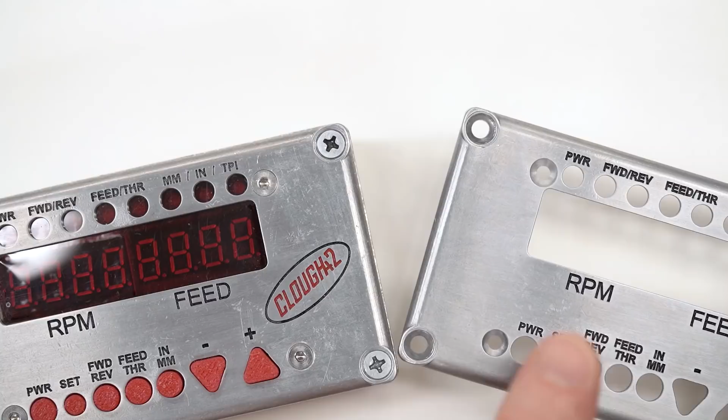I showed that in a previous video, and the engraving takes even longer. I did try an experiment with using a diamond drag engraver, which would be much faster, and it ended up just being kind of illegible. So I went ahead and just engraved over the top of that to depth and made another one, just trying to see how fast I could do it. But it's just time prohibitive to manufacture these in any kind of quantity.

So what I want to do today is design a new control panel, or a new front panel, that is exactly like this and is interchangeable and will drop in, but that is made as a PC board with the markings done with the silk screen. That's something that could still look great and could be manufactured in any quantity just by placing an order to the fab. So let's go into the computer and work up a PC board design for a control panel.

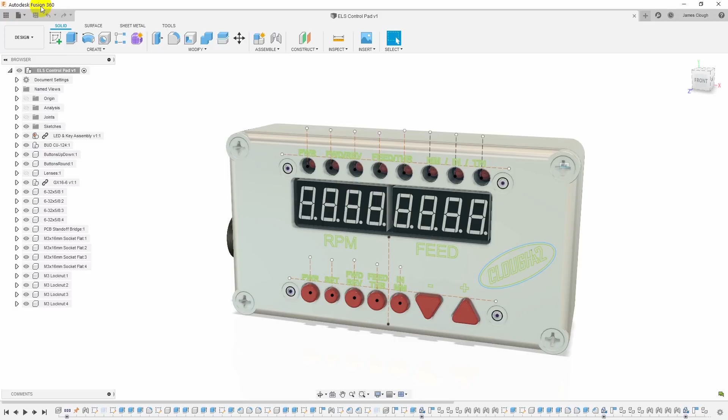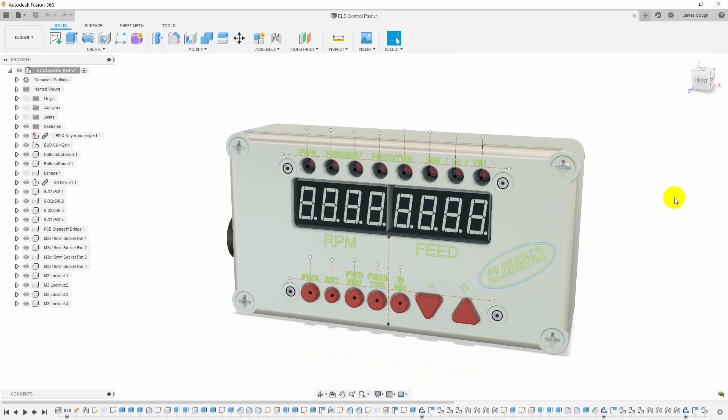I'm going to design the PC board control panel in Fusion 360. As you know, Autodesk a couple of years ago acquired CADsoft, and they have been integrating the Eagle PC board design software into Fusion 360. This will be the first PC board that I've actually designed with this tool, so I am by no means an expert, but we'll go through the process. I spent a bunch of time figuring this out, and maybe you'll learn something, and maybe you'll teach me something. If you see something that I'm doing wrong or there's a better way to do it, throw it down in the comments, and we'll all learn something.

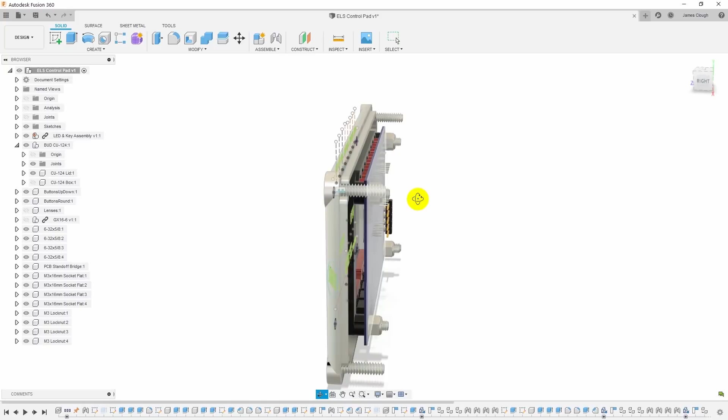This is the 3D model for the control panel, and you can see here I've got the bud box around this, but we can take the box off the back, and I have everything modeled here: the connector, which I'll get out of the way, the PC board and spacer, and the buttons that all fit into here, and then the sketch for the engraving on the front panel. We're going to replace all of that, so let me get rid of the sketch.

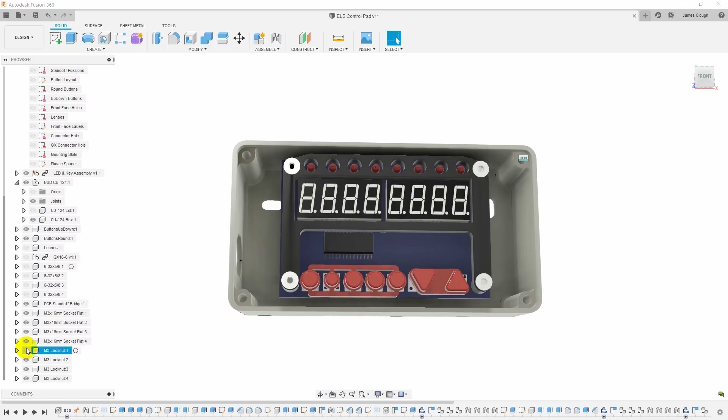What we want to do is design a PC board that fits in place of this front panel, but fits into the box. So let's get rid of the front panel for now, and let's get rid of the screws that are in the way here. So we want to design a PC board that fits into here.

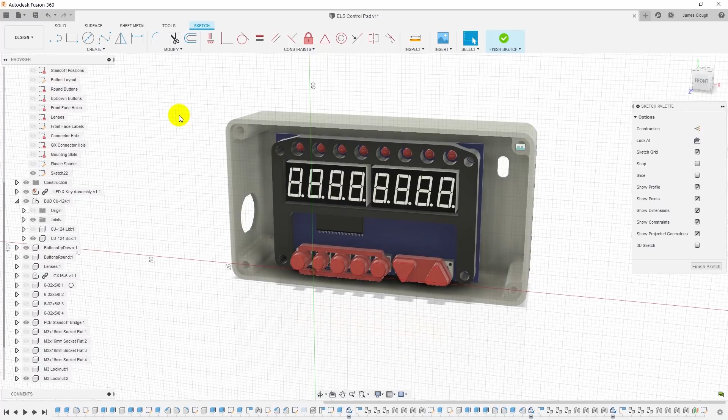Now I'm going to not sketch the PC board outline directly on the surface here. I'm instead going to pull a construction plane forward off of this just so that it's not in the way, and we're not dealing with these contact surfaces creating implied edges, and we'll just create a sketch on this surface. Now we need to bring out the outline of where we want the PC board, so I'm going to turn on construction here because I want to offset from this, and I'm just going to hit P for project, and we're going to go in here and click around the inside edges of this box where we want the edge of the PC board.

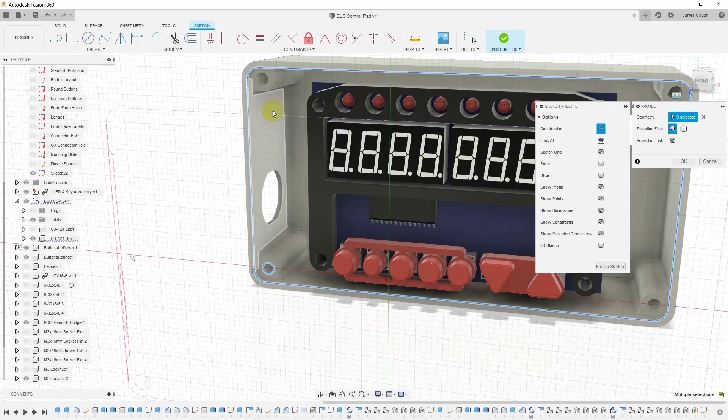And then I'm also going to click these holes where the screws go so that we can put screw holes in the PC board that line up perfectly. Now I'll say OK, and that'll give us construction lines out here.

Now for the actual edge of the PC board, I want to offset from this so that it's not actually in contact. It's a little bit smaller. So hit O for offset, click here, and go in, say, minus 0.2 millimeters. And I don't want that to be a construction line. I want that one to be solid.

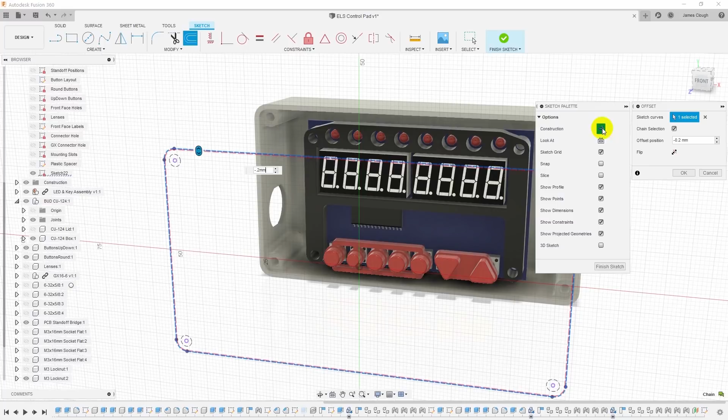Okay, and now let's put in some screw holes. So C for circle, and I'm just going to put a circle centered around each one of these. Now I didn't want to use the actual projected hole from the box because it's actually a little bit smaller than the screw diameter so that the screw will thread into it. I want to make a clearance hole.

So let me just select, hold down Control and click all of these circles to select them, make them all equal, and let me dimension those up. And my favorite table here says a clearance hole should be 144 thou. So 0.144 inches. Okay, so that gives us the actual outline of the board and where the holes should go.

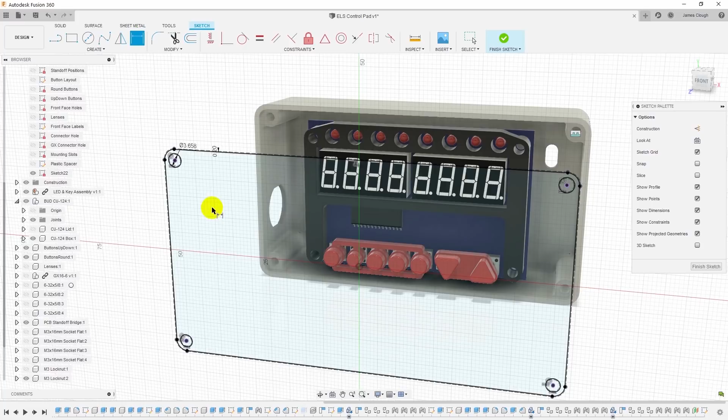Now we need the openings that we milled in the box cover as holes in the board as well. So I'm going to go ahead and turn the lid of this thing back on, and let me turn the buttons off so they won't be in our way.

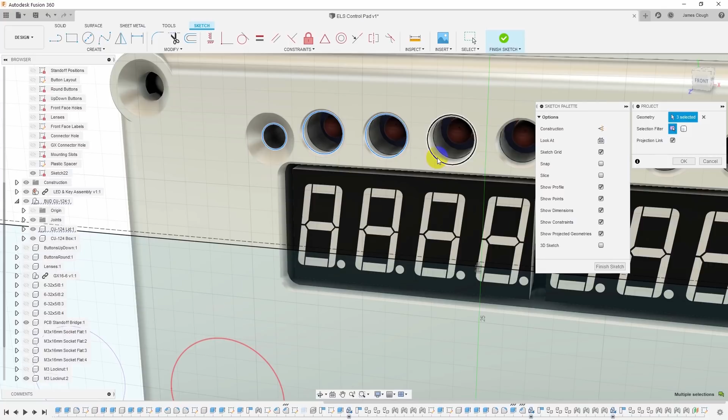And let's hit P for project again. And let's grab a few things. The mounting hole, and then I'm catching the inside, the actual inside of the chamfer of these holes. So we'll get a hole in the PC board the same size as the hole that we milled in the aluminum case.

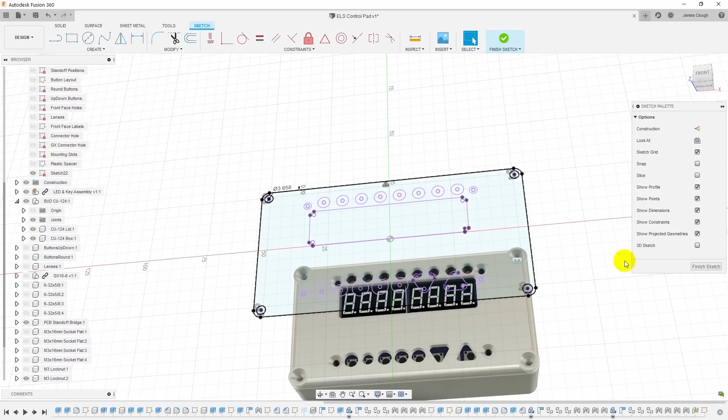Okay, and what does that give us? We've got the outline of the PC board, we've got all the holes for the screws and the buttons and the lights and the window here. So that is our sketch, and that is the outline that we'll use for the PC board.

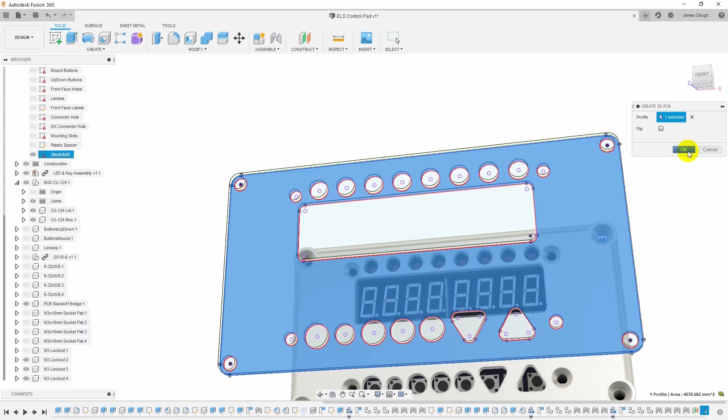Okay, to actually create the PC board, we come in here and say Create, and at the very bottom there's a new option here, Create 3D PCB. I'll select that, and then they want a profile. I'll select that profile and click OK. And now it has created a 3D PC board model. This has layers for copper and solder mask and any 3D packages for components that will ultimately get mounted on it. Let me just save this.

Okay, control panel PCB 3D. There end up being a whole bunch of files once we do this. So we've got the outline of the PC board. That's the 3D PC board.

Now we need to create an electronics project that's going to contain the schematic and the 2D PC board that will be linked to this. So we can come up here and under File and say New Electronics Design. This creates a new electronics design, and let's create a new schematic. The electronics design starts from a schematic where you put in components, then those get linked to a 2D PC board design, and then you link the 2D PC board to the 3D PC board, and it then synchronizes the shape of the board and the components back and forth as you make adjustments.

So let's add some things to this schematic. Now, ultimately, I'm not putting any components on the board, but I do want this to be shielded. So I do want to put copper on the front and back of the board, and I want to have those connected by plated through holes on the screw hole so that the screws will connect it to the grounded box.

So in terms of, I couldn't figure out how to put a pad down or a through hole, a plated through hole. So what I did is I created a library and made a component that just has a plated through hole pad. I'm not going to go into that here, but this is a plated screw hole that I created for a number 6 screw. So I'll just say OK, and I'm going to have 4 of these on the 4 corners, so I'll just lay those into the schematic.

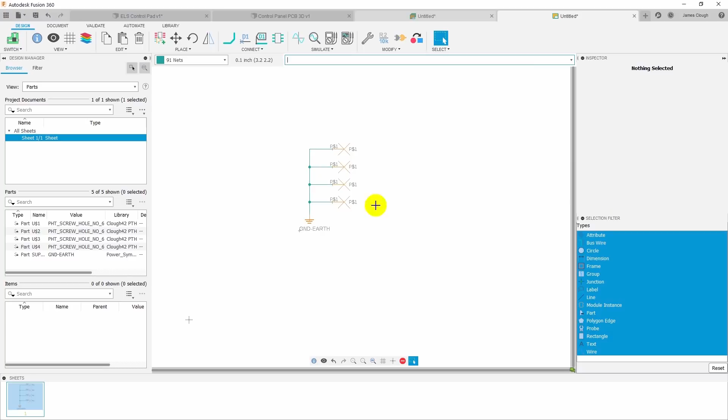And then I also want to place a ground symbol, and I want an earth ground symbol. Place that here, and then we'll just route and connect all of these screw holes to the ground. And that is our schematic. Let me go ahead and save this.

And this was the electronics project that has that link to it. Let me go ahead and save that as well. Okay, so now I've got this.

Let me add a 2D PC board. So I'll click New PCB, and it will add this. And this is now a PC board that's connected to the schematic. We'll save that as well.

You'll note the outline of the board is just a basic rectangle, and we have our components down here, with the 4 screws sitting off of the side of the board. So I'm going to go back to the 3D PC board and click Link to 2D PC board up here in the corner. I click on that, select my 2D PC board design, and it links them together.

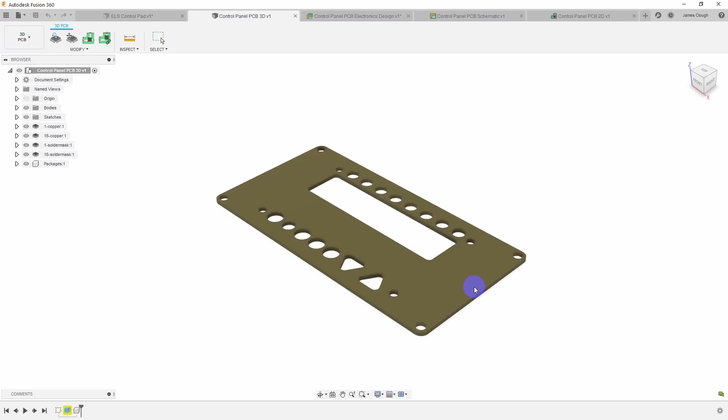So now we're back looking at the 3D PC board, and you can see that now it actually has the correct shape with the correct openings in it. And before I go any further, I'm going to go ahead and save this.

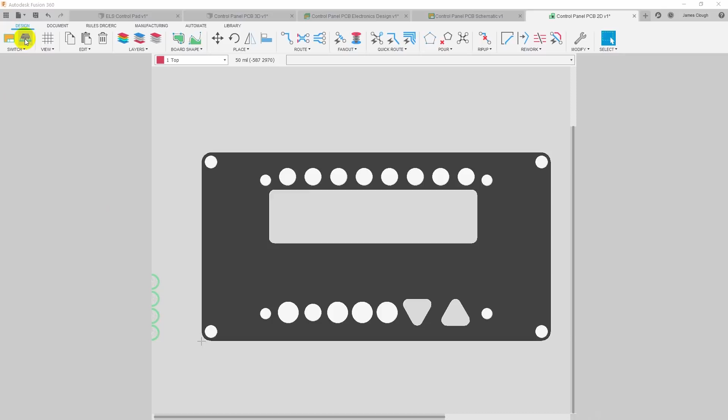But in order to complete the linkage, if I just try to save this right now, it'll warn me that the 2D and 3D PC board documents are out of sync. I don't know why that is, but if I just click up here, say View 3D PCB, it'll take this 2D design, push it over to the 3D model, and now I can save everything and it's all linked together.

You can see we've got the green solder mask, we've got the holes over here on the side, and it's trying to show packages. I didn't define packages for these, so I'll just turn off that layer because there's nothing there. So we have our 4 plated screw holes that are going to go in these corners, and we've got the PC board. And now we can just save everything.

In fact, when you save the 3D PC board, it saves everything except the electronics design. I will admit, I honestly don't know how these things are connected. It seems like kind of a mess to me.

Okay, the first thing I want to do is take these holes that were defined in the sketch, and I want to replace those with the plated through screw holes. And I couldn't find a good way to do this except just to mess with the coordinate system.

So I'll click on this hole and I can see the location: 115, 115.20079. I have no idea why that fraction, but I am just going to go ahead and hit Control C to copy that. So now I can get rid of this hole by highlighting it and hitting delete.

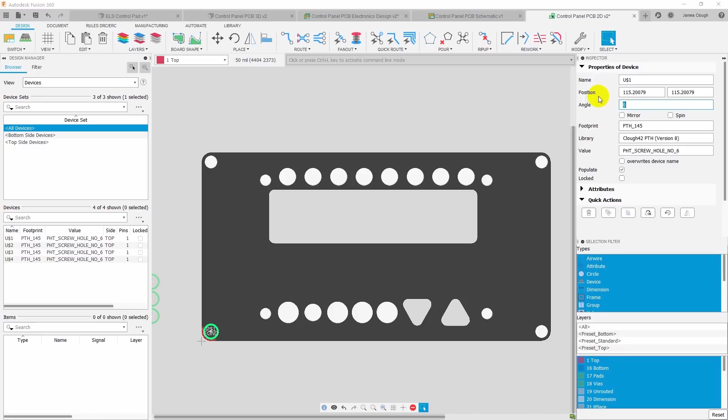And then I can click on this hole and just change the location: 115 dot paste, 115 dot paste. And so now I have that screw hole in the location where the hole in the PC board had been previously. Let me just go ahead and put the rest of these in place.

Okay, so I've got all those screw holes in the right locations in the corners, and you'll see that there's an error being shown here, and that's because the copper of that screw hole is too close to the edge of the board, given the design rules.

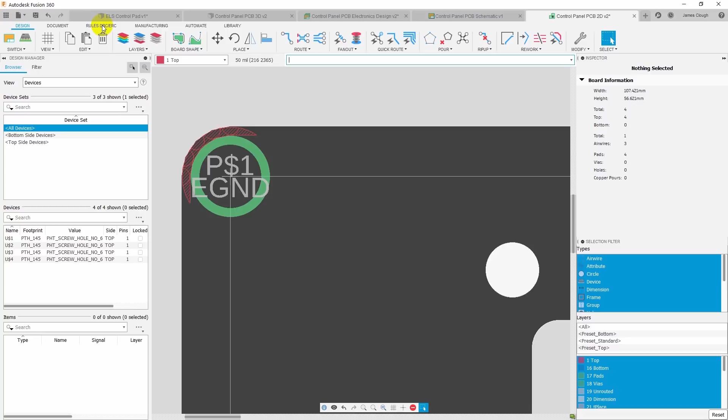So I'll just go over here to the Rules DRC ERC tab and click on the DRC, which is Design Rule Check, and it will pop up the rules. And I can go over here to clearance, same signals, distance, copper to dimension. So the distance between copper and the outside dimension of the board is set to 40 mils.

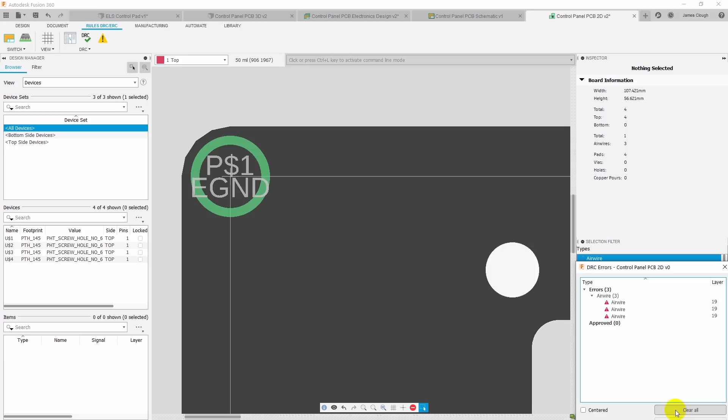I'm going to set that to 5 mils. Apply and then check my rules, and I have 3 failures, and those are air wires because these are all marked as being connected to the ground, and they're not actually connected to anything. So that is fine. We will go ahead and take care of that next.

So instead of hooking traces between these, I just want to have these connected to copper fills on the board. So we'll go back over here to Design, and we'll go over here to the Pour section and define some polygons. The first one is on the top layer, and I will just click. I'm just creating a polygon that is bigger than the board because it doesn't really matter.

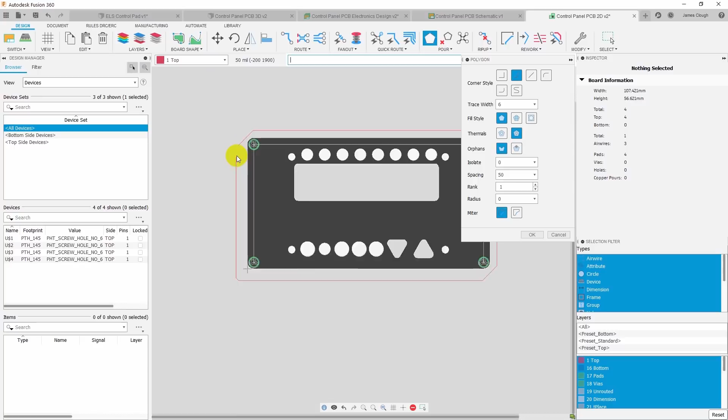It'll only put copper where the board is. And this will be the same as the signal that we have here on the screws, which is EGND, E ground, the earth ground. Okay, and so that defines that on the top layer.

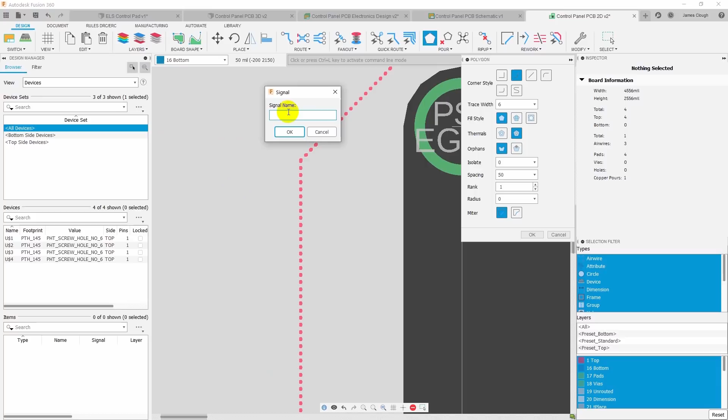Now I'm going to put one on the bottom layer as well. Click, and this will also be E ground. Okay, so now we have the polygons defined, but no fill. So we'll just go up here and click Pour Polygons, and it will pour it.

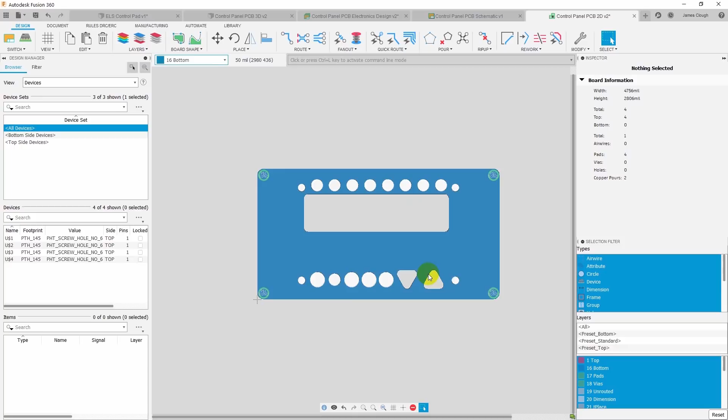So if we look at the top of the board, you can see we've got a pad here with copper poured all around it. And if we look at the bottom of the board, we see exactly the same thing, blue with the copper poured around it.

We can go over here to manufacturing, and we can click on CAM Preview, and it will open up a preview of what this board is going to look like. So we're looking at the top, the green solder mask, and we can look at the bottom side, and it looks basically the same. Let's change a couple things here.

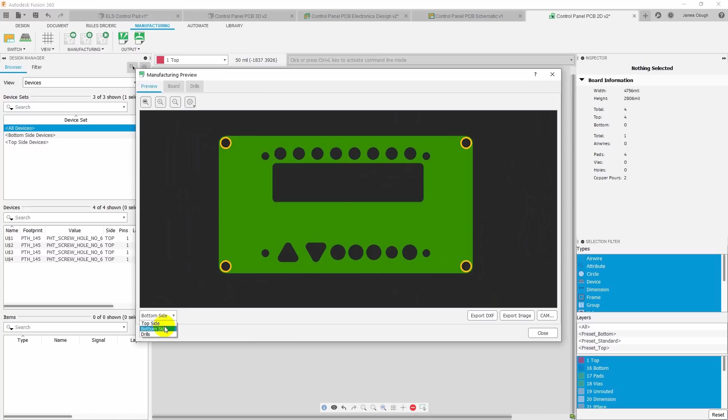We're actually going to make the solder mask black, and we're going to make the silk screen white, and let's set the copper color to, I don't know, something silvery.

Okay, so that's what the board's actually going to look like. You can kind of just barely see it. So that looks okay. Looks like we're getting what we want.

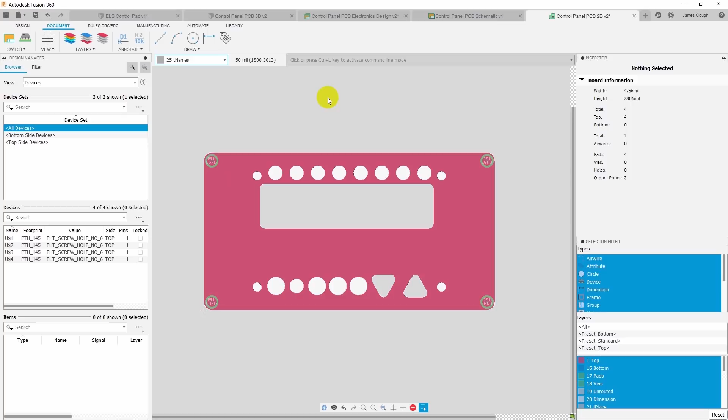Okay, and obviously we need to put some text on here. That's the whole reason we did this. So let's go back to document, which is where this happens, and we're going to put the text in the T names and B names layers. T names is the top names, B names is the bottom names. So T names, this will go into the top silk screen, and we'll just say draw text.

Now we'll enter the text. First thing we want to put on here is the RPM marking. Now we have 3 fonts, and we have vector, proportional, and fixed. And I've messed around with this, and no matter what I do in here, it appears to always output a vector font. If I say proportional and adjust it the way I want, it doesn't come out that way. It sends the vector to the Gerbers anyway. So I don't know. If you know how to deal with this or how to choose other fonts, let me know down in the comments.

I don't know how to do it, so I'm just going to move forward with the vector. And let's go ahead and see how big that is. That's not anywhere near big enough. Let's run that up, say 200. Yeah, that looks pretty good. Ratio, go 12%, make it heavier.

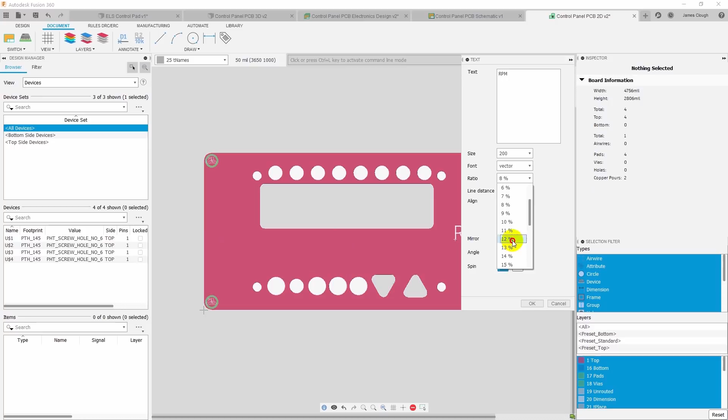Okay, we want an RPM there, and then feed over here-ish. And then we need our labels along the top. And that's power, forward, reverse, feed thread, millimeters, inch, TPI. And obviously that's way too big.

Let's try something like that, that actually looks pretty good. Let me put another space in here. Okay, now obviously I'm not able to place this exactly where I want, so over here on grid, I'm going to change the grid settings. Right now it's 50 mil, I'll make it 5 mil. That will give me a little more freedom in positioning this.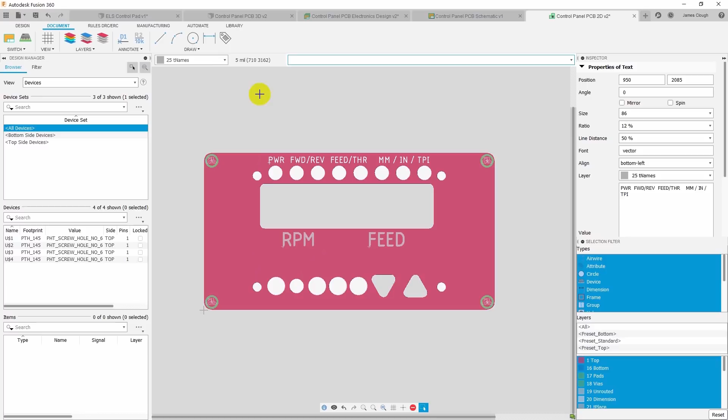Okay, that works for that. I need to label the buttons down below. And these I'll do, some of these are multi-line, so I'll have to do them separately. Power, that'll work for that. Power set, forward, reverse. I want this centered.

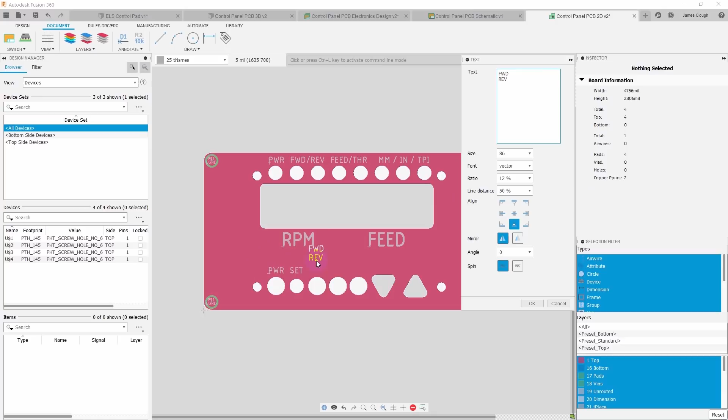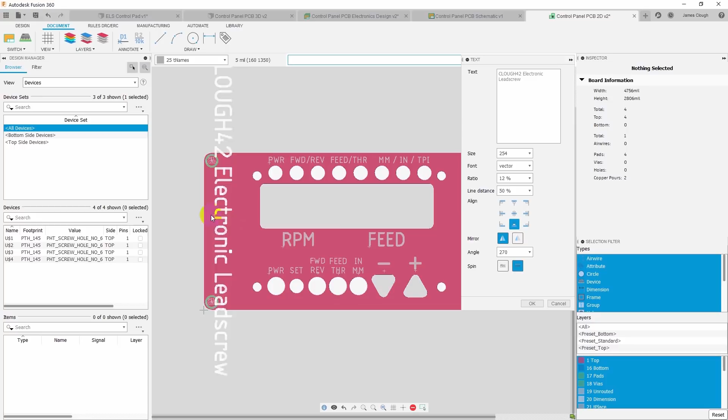Okay. Good enough. And let's grab and put a little bit more text on this thing. Right click the mouse to rotate. I actually want it to go the other way, so we'll flip the spin. And that's way too big. Okay, that's good for the front.

Now let's look at B names and put some things on the bottom. And our layers, I'll say flipboard, so we can look at the bottom. Okay.

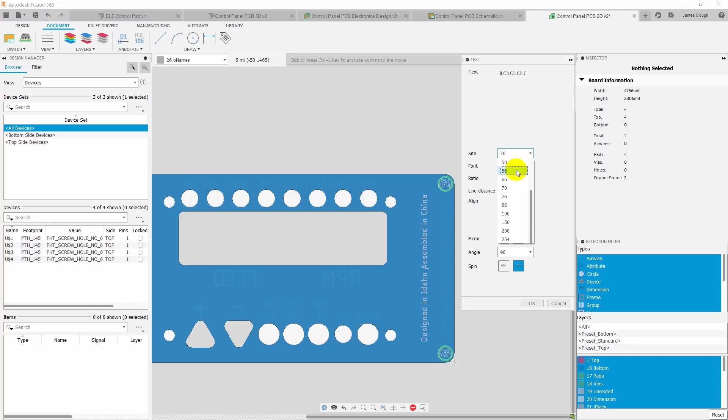And then for, since we're going to have these manufactured at JLC PCB, I don't want them putting their serial number or their order tracking number on the front. I want to control where that goes. And the way you do that is JLC, JLC, JLC, JLC, and you just put this text somewhere on the board. And then when you place the order, you have to let them know that that's there, and they will utilize that. So that's the back.

Let's flip it. And look at the front. That looks pretty good. We can pop over here to manufacturing and look at the cam preview. That looks pretty good for the top. That looks pretty good for the bottom.

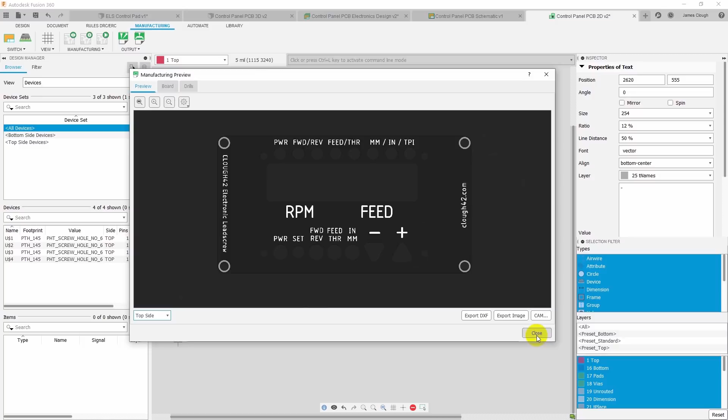Okay, now let's push this over to the 3D PC board. And that looks more or less like what I expected. So we've got this PC board. Now let's take that and put it back into our 3D design.

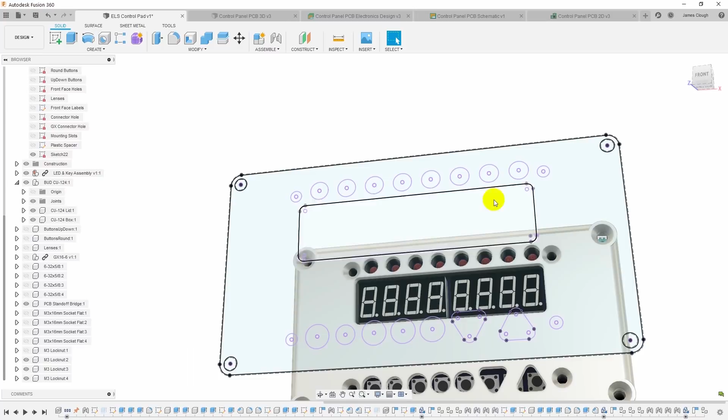So here's the 3D model. Let me turn off the sketch that I used here. And let's turn off the front panel of the box because we don't need that anymore. We have our model in the box here. In fact, I'm going to go ahead and turn that box off completely.

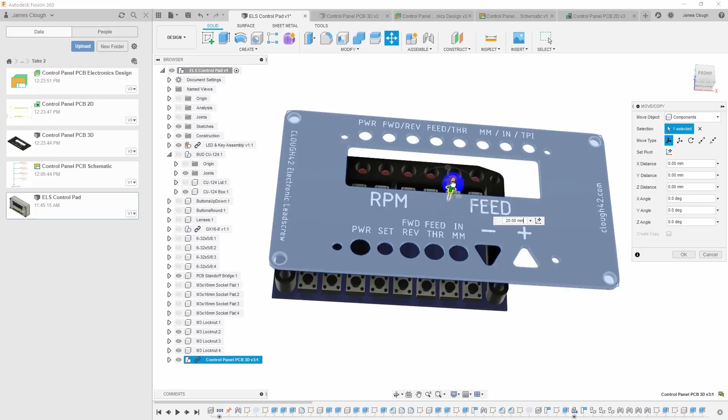Now let's take the PC board and line it up here. So let's insert it and just take the 3D PC board, drag it into our model. I'll just stick it someplace where it's not going to cover anything up. And then we'll just join this up.

Now this, if I start moving things around, you can see it separates. I'll just hit Control Z to put that back. That's because it did not add a rigid group. I'll just right click and say rigid group. Okay. And now when I grab this and move it, it all stays together.

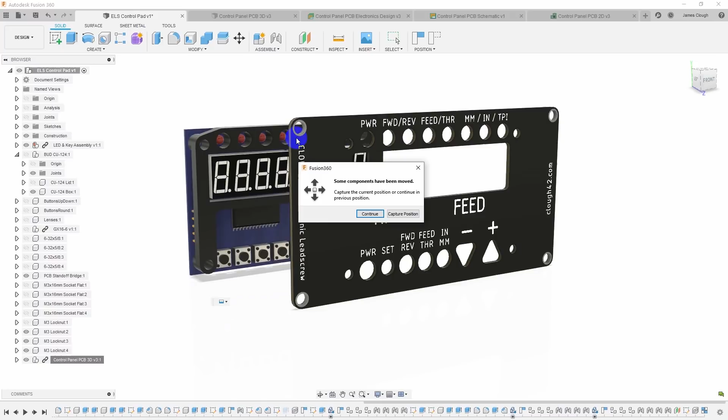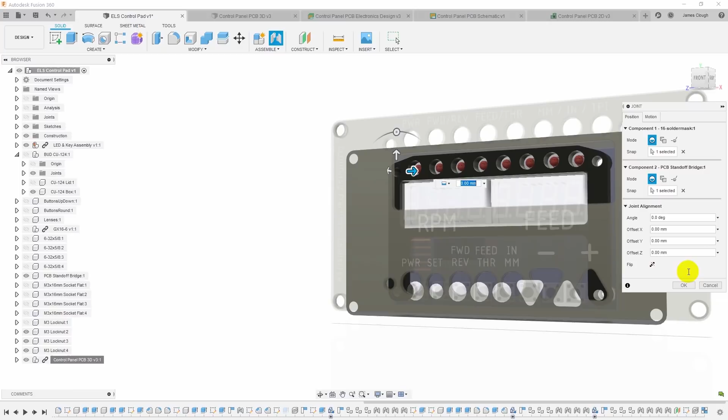So I'm going to join this, hit J for joint, and then I will come up here and grab the back of, let's say, that screw hole, and join that up with the matching screw hole here. And that'll place the PC board in the correct position. And click OK. So now we have that PC board on the front here.

And it looks like everything lines up. You can see that my RPM's not perfectly centered here, and the feed could move a little bit to the right. I'm not going to mess around with any of that stuff today. For these purposes, just understand you'd go back and make adjustments to make this fit.

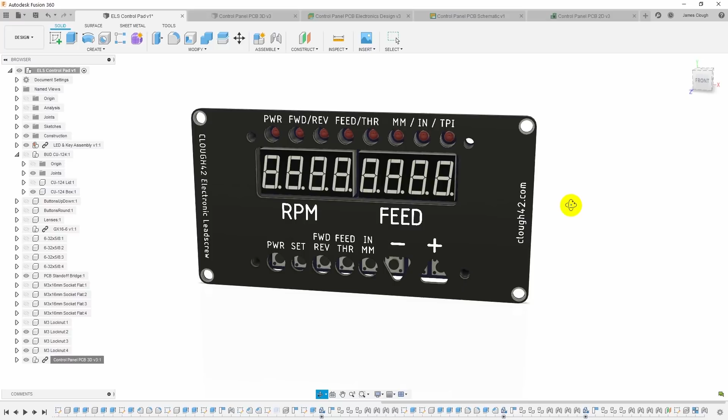Now I'd like to put a box on this, but if I just turn on this box, you can see that we're in the wrong position. And since I've got the other stuff in this model as well, I'm just going to forget about it. I'm just going to hit Control C on the box and Control V, and insert another one, and we'll mess around with this second box, which we can move around and put wherever we want.

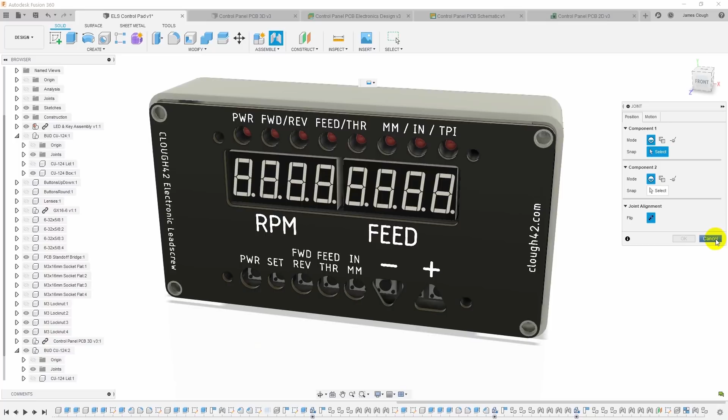So I will hit J for joint again. Okay, hit J for joint, and I'll just say capture position because I moved it out there. And let's line up this screw with the back of the PC board here, and I'm going to try to catch the edge of the copper layer.

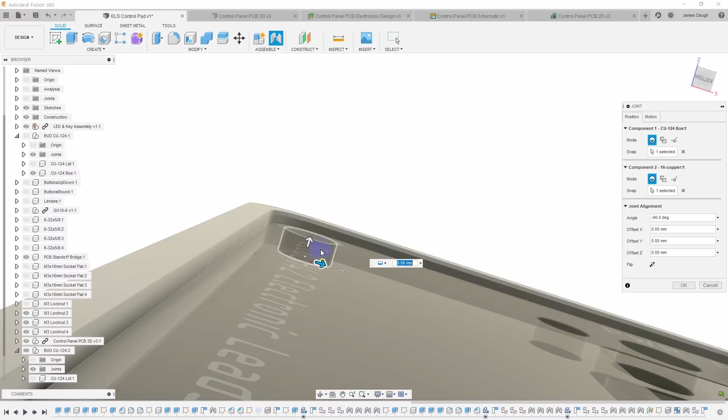Okay, so you can see the way that's fitting in there, it is sunk down below the surface of the box. I'd like to have it at the surface or even a little bit proud, especially since the head of the screw is going to overlap the box slightly and I don't want it to bind. So we'll push the box back, say 1 millimeter, and that'll put us just proud of the surface. And I think I like that. I think that will be fine.

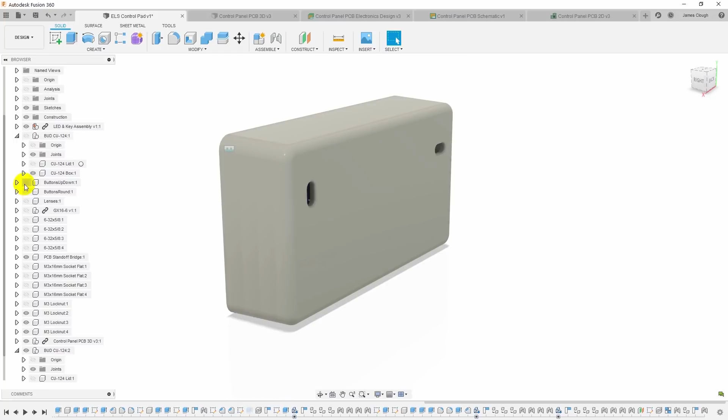Now what that means is that on the inside here, turn this box off, it means that I'm going to have some kind of a spacer here to hold this forward. And what I'm going to do is I already have this plastic bridge piece that's in here. I'll just redesign it and add little tabs that come out, 1 millimeter thick, that come out and go around that screw hole, and that'll make it fit neatly in there and create that space.

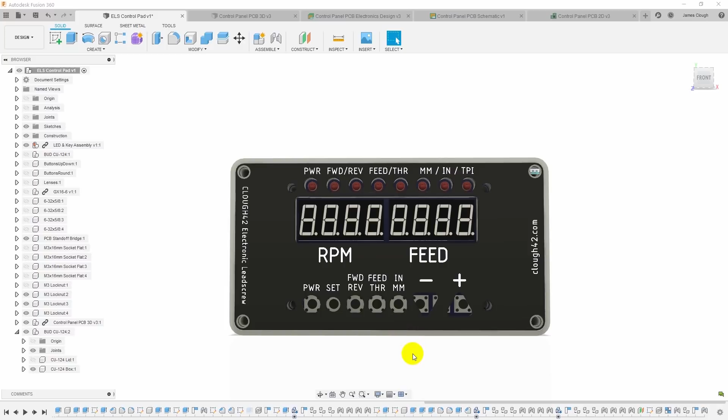And just to get an idea what this will look like, let's turn the buttons back on. And those should fit exactly the same. Let's put some screws in this thing. So insert McMaster-Carr component, screws.

Whoops, I want rounded head screws, hex drive, and these are 6-32. Let's go with 5/16, and we'll just grab any model in here. They're all going to be the same.

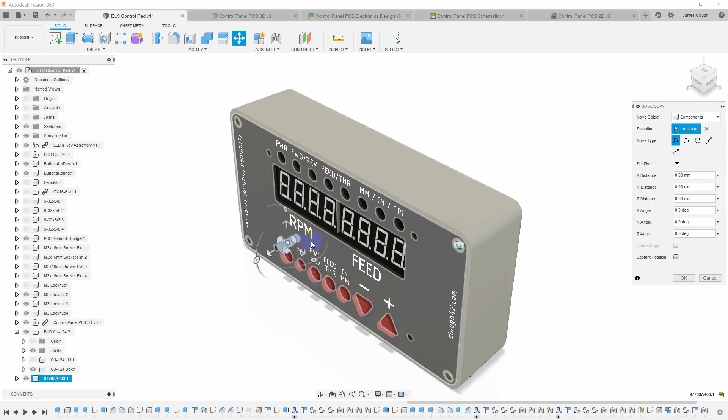And I want a step file. Put it out here where it won't be in the way. Rename that so I can keep track of it later. And then Control C, copy, Control V. So I'll insert 3 more copies of it. So now we've got 4 of those screws.

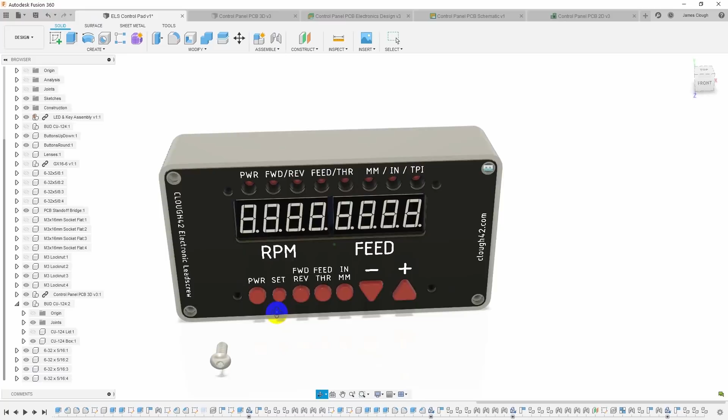So now I can put those in the correct locations. J for joint, grab the underside of the head, grab the front of this hole, and then do the other 3.

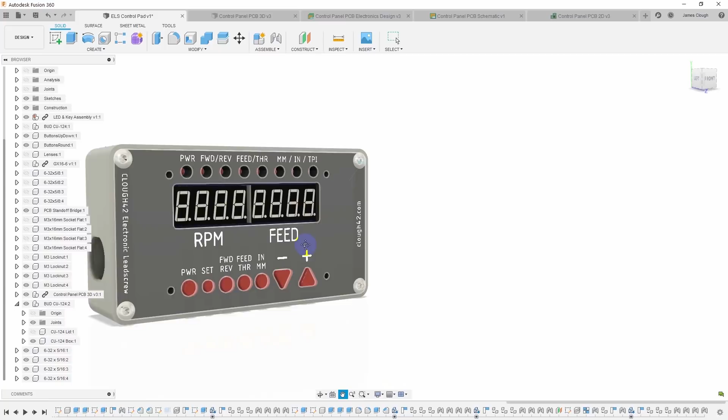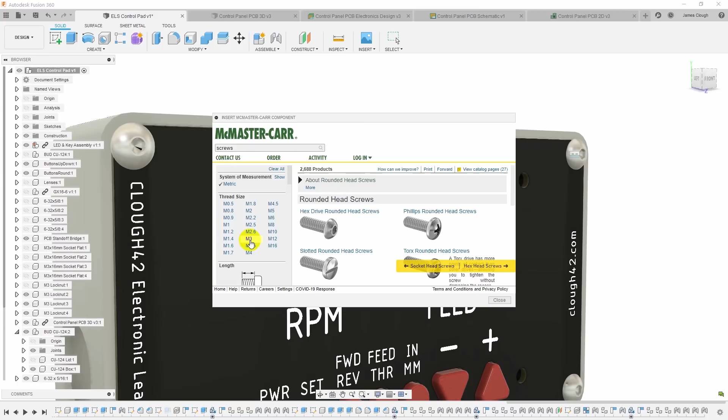Okay, and let's do the same thing for the screws that go through the front here. What we had used previously in the model was a flathead M3 screw because it was countersunk, but we don't have countersinks here since it's a PC board, so we'll just go and do some button head screws. Screws, rounded head, metric, M3 by 16.

Now the silver screws in here are kind of nice, but I think I would prefer black. So I'm just going to right click here and say appearance. And we're going to go down here to metal, coatings, coating black oxide. And I'm just going to drop that onto that screw.

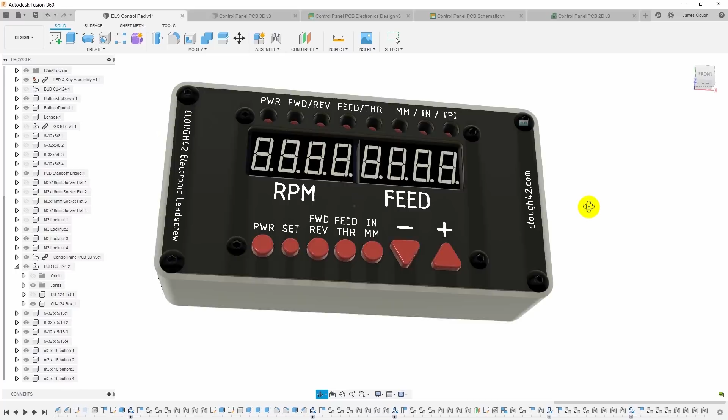Now in this model, they're showing the appearance of the black oxide being darker than the PC board, but I think in reality they're going to be pretty similar. So, that, I am very happy with that.

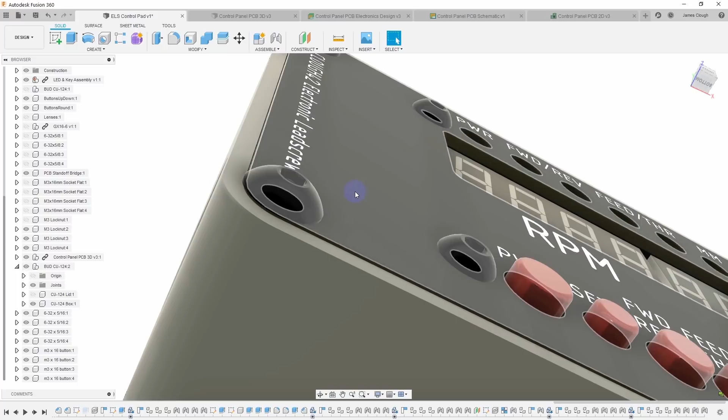And if we go in here and look at these corners, you can see that screw head does overlap the box a little bit because it goes past the edge of the PC board. And that's just because in the bud box design, there's a lid that sticks up another 1/8 of an inch or so, another 3 or 4 millimeters, and then the countersink is in that. So it's not really designed for a screw to go down inside the box. But I think this is a good compromise, and I think it looks pretty sharp. I'm pretty happy with this.

So let's export this PC board and get it manufactured. When I have exported PC boards from Circuit Maker and uploaded those to JLC PCB, I had to mess around a bunch with the files to actually create what JLC PCB was expecting, but it turns out that in Fusion 360, with the integrated Eagle CAD, it appears to just output files that work with no modifications at all.

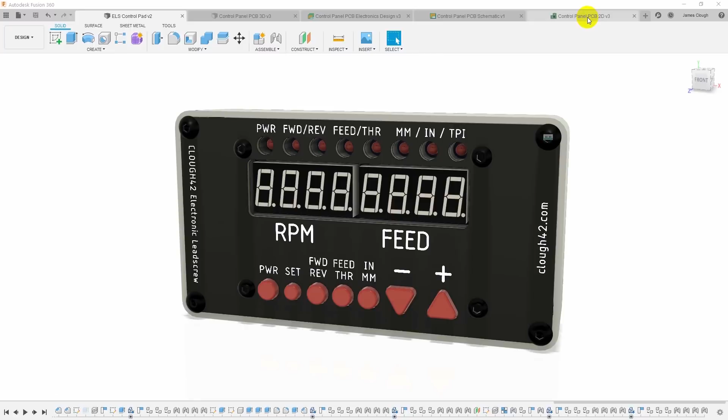Now, I haven't done anything with assembly yet, but just for PC board manufacturing, it works pretty well. So we'll go back over here to the 2D PC board model and go to the manufacturing tab. And then there's a button here for CAM export, and we just click CAM export.

It shows in the little pop-up dialog that popped up on my other screen all of the files that are going to be in it. I can just click OK and choose a location. And it chooses this Fusion 360 Electronics CAM and names the file with the name of the project, the actual version, and the date.

That looks good enough. We'll just grab a browser and go to jlcpcb.com and click the quote button. Add your Gerber file. Here's the file.

And that sure looks like what I want. We'll click on the Gerber viewer here and go have a little closer look and make sure this really looks right. The biggest thing I was worried about is the internal cutouts, but boy, that sure looks like it's doing the right thing. And we've got the plated through holes on the sides. Great.

Let's see, layers 2, dimensions, you can choose quantity. I want a black solder mask. I definitely want lead free. It's a little more expensive, but if I end up selling these and I ship them to Europe, I want them to be lead free.

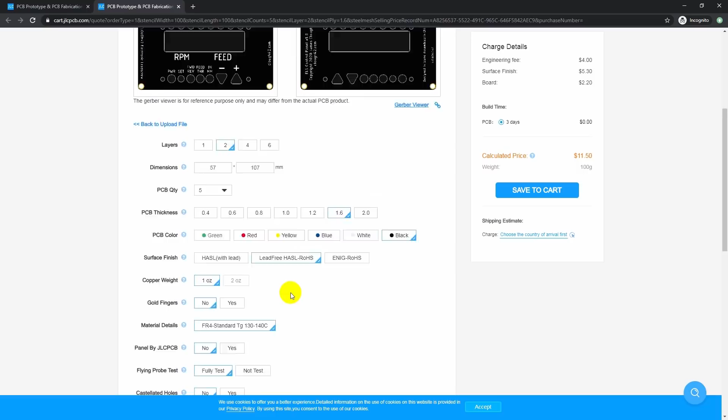Don't want them to panel. There's no point in testing these at all because I don't care about the electrical connections. And here's the remove order number. You can specify a location and it will use that little JLC, JLC, JLC, JLC that I put on the back side. And that looks like that is about it.

I can go ahead and place an order, and in fact, I already did place an order for these. And through the magic of planning ahead, the boards are back from the fab.

Pull one of these out, drop it here where you can see it. I am pretty happy with how this turned out.

Now you'll note that the lettering is fairly light, very, very fine, and it isn't as dark as I would like it to be. As it turns out, I mentioned when I was showing how to make the PC board that there was an issue with the fonts. I had originally designed this to use the proportional font, which looked much bolder on the screen, but when it output the Gerbers, it switched to the vector font.

And I honestly don't know why it does that. If you know why, you can throw that down in the comments. But what I saw in the preview, and what actually came out in the CAM, and of course it was in the CAM preview but I didn't notice, and it was in the preview on the PC Board Fab website and I didn't notice, was this finer font.

So I actually have a newer design, like the one I showed you, that has slightly larger and darker text, gone from the default like 8 or 9% to 12% on the thickness. I have some other ones, and I will be ordering another batch shortly that should look a little bit better than this. But honestly, these look really good. The text is fine, but it's really legible.

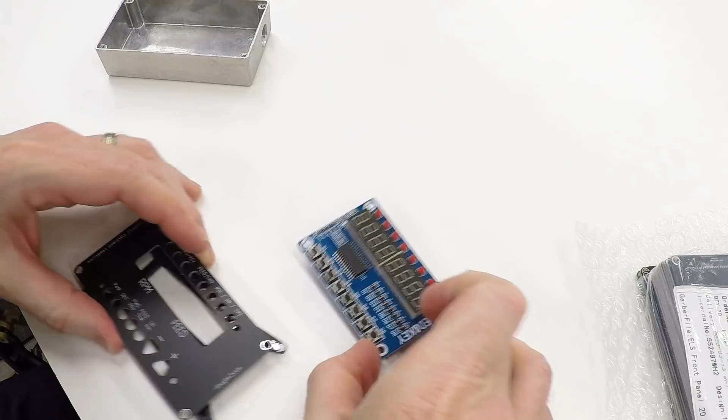On the top of the mounting studs so that the PC board will sit in there cleanly on top. So I have the PC board here, and of course this bridge goes over it, and then the PC board for the control panel goes on the front. Now you can see that all of those letters are nice and white and visible, so I want to cut out a piece of red filter and put it over the front of that, and then a piece of clear plastic to go over the front of that to then protect it.

Because the PVC material of the red filter is actually pretty soft. Oh, I need to cover that portion of it.

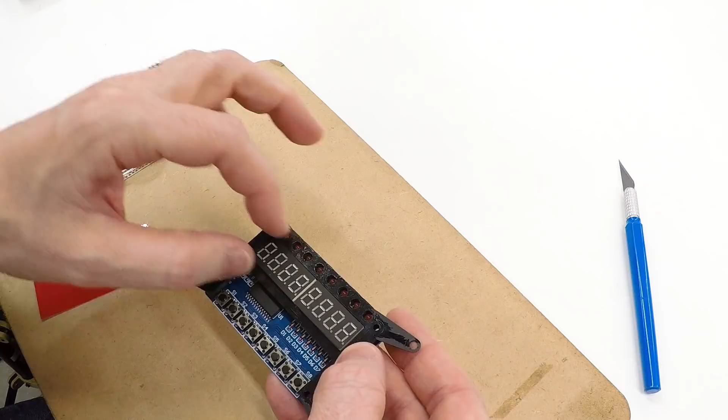And I've got this set up so that it should be close to the surface here, so I should be able to just put it on. I can see that on this print it is just a shade below, maybe 0.2 of a millimeter, maybe slightly more. And so it's going to warp it a little bit, but it'll be all right for this.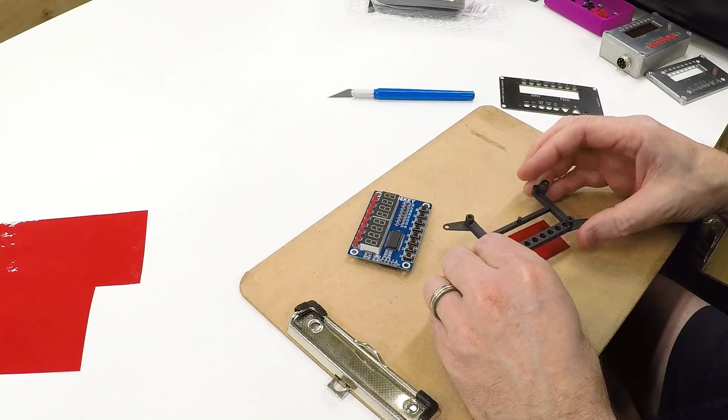Okay, this will end up sticking to the front of that, so I won't go ahead and stick that down just yet. I need to cut a piece of clear plastic to fit over that as well. It's not blood on my finger, it's a little piece of red filter.

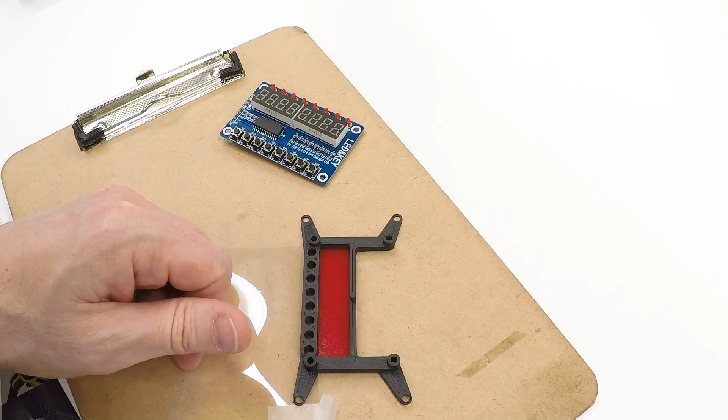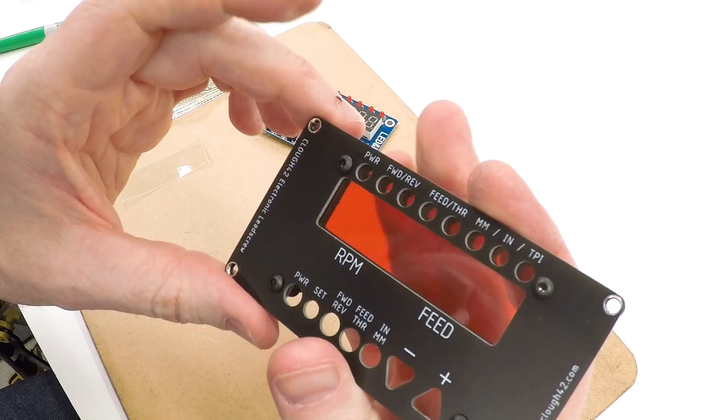Okay, so that's now on the back, and we've got the clear window over the red filter. I don't see anything stuck to the filter. We've got our screws in.

Let me find my buttons. These are the 3D printed buttons made out of NinjaFlex. Drop those in, and then we're ready for the PC board. And when this goes down, the displays will stick to the adhesive of the filter.

Okay, and let's put some nuts on the back. Okay, that is the control panel, and then this should drop right into the box. And it does.

It's a little bit tight, and the second order that I'm putting in with the bolder text, I'll thin this down by about 5 thou, top and bottom.

Now these screws, the threads are not great on them because I didn't actually have 5/16 inch screws. The ones I had were a little bit too long, so I shortened them on the bench grinder, and it kind of mangled the last thread, and I cleaned them up the best I could. I will place an order for some proper screws shortly.